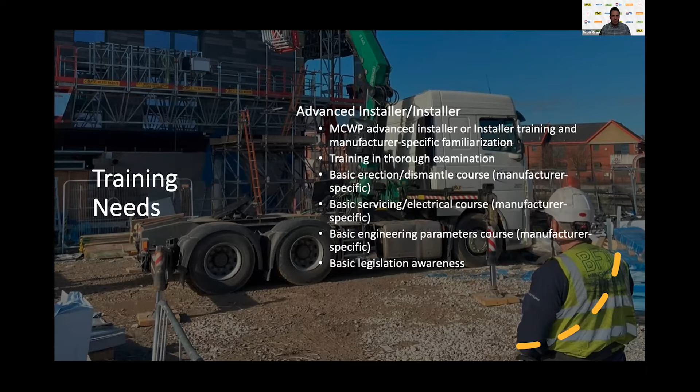Basic engineering parameters course, again, manufacturer specific, and basic legislation awareness. Whatever country they're in installing the equipment, they need to be aware of what the regulations and standards are in that country to ensure they're being compliant with the law. And this is all going to come as part of their installation training. And then a bit more for the installer. They've got a lot of responsibility, obviously.

They need their own health and safety awareness, again, for whatever industry it is they're in. Safe systems and emergency procedures, what to do in the event that something isn't going right or something's wrong with the equipment during the installation process, what's there, what's keeping them safe, and what the emergency procedure is, what to do to ensure we can get the machine recovered and back down to the ground.

Risk assessment guidance, again, installers need to have a good understanding of risk assessment themselves. They are the best placed people to understand the hazards involved when installing the equipment, and should be involved in that process of creating the risk assessments and method statements for their work on installation to ensure that all the hazards are being realised, and that we've got control measures in place to make sure the risks are kept to a minimum. And then slinging and signalling.

At some point, maybe when the machine's delivered, they may have to offload it. They may be using a site crane to do that. They may be using a vehicle mounted crane, a HIAB of some description, to unload the equipment. And then they may even use that then to begin the installation, to position the mast climber components, build the decks together, and maybe even put some mast up to the first tie position. So slinging and signalling training is going to be quite vital for them as well.

Then we get to our demonstrator. And as I said previously, our demonstrator's role is really important. They need to be able to give a demonstration of mast climbing work platform to others in a documented scheme, and have basic legislation awareness. Again, for whatever country it is that they're in the world, there will be some legislation in place, the regulations that say how they've got to go about their process.

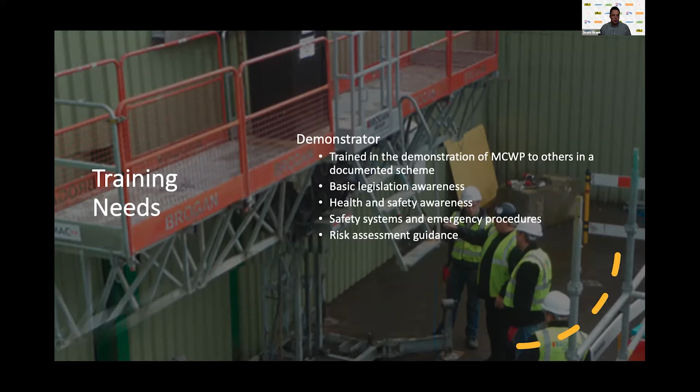And again, the risk assessment guidance, they're going to be more focused now on making sure the operator is familiar with the risk assessment for their specific task when working from the mast climbing work platform. So it's good to have that knowledge and guidance of risk assessment.

Then we get to our operator. We started looking straight away at our operator, but then realised we had all these other people to discuss first. We finally get to our operator now, who's going to need their basic operator training to know how to use a mast climbing work platform. Basic inspection and testing, an understanding of what's being looked at, what's being tested, so that they know what the parameters are, what the limits to the machine are, and that they can make sure the machine continues to work within those.

Again, the safe systems and emergency procedures. If something goes wrong on the machine, every other user on that platform is then going to be looking directly at the operator to know what to do and how to get that machine back down to the ground and everybody safely off of it.

And risk assessment guidance, again, not just for the use of the mast climber, but for whatever task it is they're performing from the mast climber. They need to have that understanding of the risk assessment, the method statement, what the hazards are, and how to eliminate or reduce them as much as possible. So they're all our training needs.

And this is where I now want to look a bit more closely at the role of the demonstrator in conjunction with our operator. So in 2016, IPAF launched the Mast Climbing Work Platform operator training course. And prior to that, all users of mast climbers were inducted or familiarized in the use of the equipment by our trained demonstrator. So this would usually be a very experienced person from the supplying company who, once the machine was handed over for use, would give that familiarization to the users in how to make the machine go up and down, what to do in the event of an emergency, how to emergency lower it, and various other aspects of machine use. It should be at least half an hour's worth of familiarization, but could be longer.

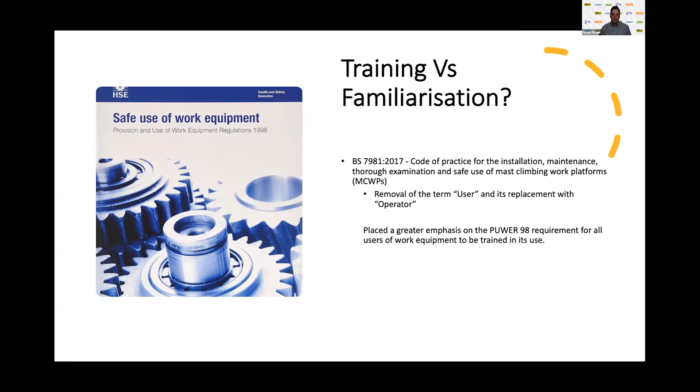And this placed a greater emphasis on the UK regulation, PUWER, which is the Provision and Use of Work Equipment Regulations, for all users of work equipment to be trained in its use. So again, we've got this operator training course, let's use it, let's make sure that our operators are properly trained to use the equipment, and let's get our demonstrators in there, familiarizing those people on different manufacturers or models of equipment. And this is going to bring about great benefits, certainly for the employer of the user.

Employers don't or shouldn't want to just merely tick a box and say, brilliant, someone's had a bit of familiarization training, now they can go ahead. They want to have some comfort in knowing that they've fulfilled their legal obligations, and that the equipment is now being used correctly and safely, and that the equipment is being kept in good order, so there's no unnecessary damage charges at the end of the project. Hopefully our operators are looking after the machines, using them correctly as they've been trained to do.

And our trained operator, who understands that they have a responsibility to themselves and others, is going to be a huge asset to the project. They know that the equipment is going to be used correctly and it's going to be better looked after. They're going to have confidence in their own abilities. They're going to have better knowledge of the equipment and what its limitations are. And they're going to be better equipped to spot any faults or potentially unsafe conditions.

So that concludes my presentation.

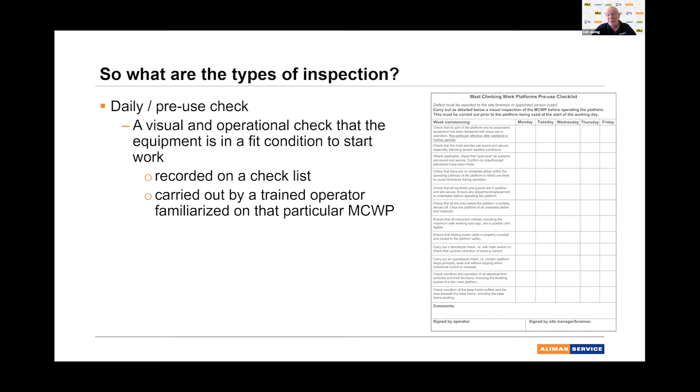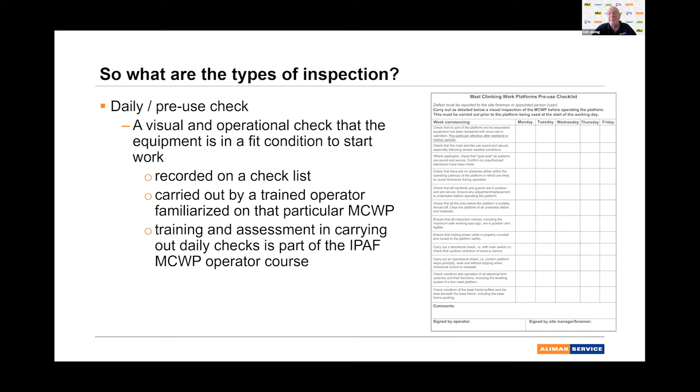It gives the user organization, the site, the benefits of being able to show that they have carried out pre-use checks. And it also gives the guys that are operating the platform the ability to be able to report defects in a way that is actually written. So they're done by the trained operator who has been familiarized on that particular mast climbing work platform. And the training and assessment in carrying out daily checks was part of the IPAF Mast Climber Operator course, probably a key part of it.

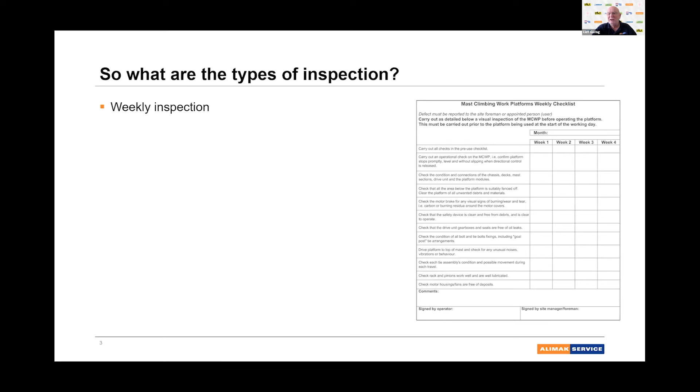Beyond the daily checks, there are weekly inspections. So they're very slightly different in so much as the inspection is a check to make sure that the machine is still safe to operate. Yeah, it's looking at damage, wear, and that the safety functions work correctly. Again, there's a checklist provided, which is normally machine specific. The one on the right is a generic one from the British Standard again, and that's BS 7981.

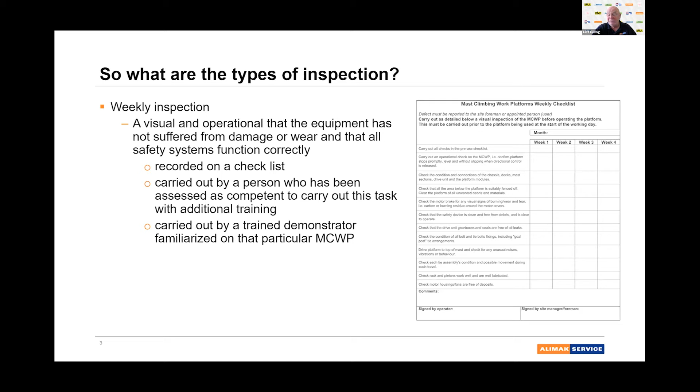It consists of all of the daily checks, plus additional items where you're actually looking at things in a bit more detail. So a person who carries this out has been assessed as competent to do it, and they require additional training to achieve that. This is one of the differences between the operator and the demonstrator courses. Demonstrators are trained and assessed in weekly inspections. The joy of it, being the demonstrator rather than the operator, is you've now got a different person doing the checks. So you're effectively auditing the daily checks, which increases safety.

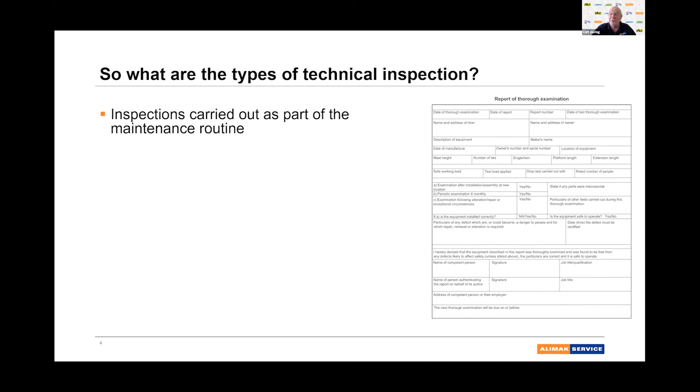Then we've got some more technical inspections. So these inspections are carried out as part of the maintenance routine. The inspections that are done here are typically done by a service engineer. So this is a guy with mechanical and electrical skills who will be looking in much more detail at the machine. And typically a supplying company would provide the person that does this, and they may be done six weekly, may be done monthly. It depends on the site conditions and what the machine is being used for, how often these services take place. And those inspections are based on what the manufacturer's literature suggests. So all the manufacturers for all the products have a target list of maintenance items that should be carried out. Some of it includes inspection, some of it includes actually adjusting things. So all done by a service technician.

The next type of technical inspection is a bit more in depth. And depending on what country you're in, there may be a legal driver for this. Certainly within the UK, we have the Lifting Operations and Lifting Equipment Regulations, which stipulate exactly what needs to be looked at and the format of the report and how long those reports are kept for and where copies of them go. So this is a statutory examination that is carried out by somebody identified as a competent person. So beyond what a service technician would normally do. It's a complete check of the equipment for continued safe use and also whether or not the piece of equipment has been installed correctly, if it's the first thorough examination.

The thorough examination itself can include testing, which is in the remit of the competent person to decide what type of testing may be carried out. So it may include load testing, could be tests of safety gear, could be tests of electrical systems, the inclination system on the machine. There are numerous extra pieces depending on what product it is. Could include dismantling components, though typically the machines aren't dismantled while they're in use. So normally the dismantling inspection of component parts is done as a function of a thorough examination that's carried out at the hire company. So things like the internals of a gearbox, wear on gearboxes would be typically done in the service centre of the hire company rather than on site. But it's down to the competent person to decide whether or not they want to go into more depth during the thorough examination. And again, it depends on site conditions and how the machine is being used.

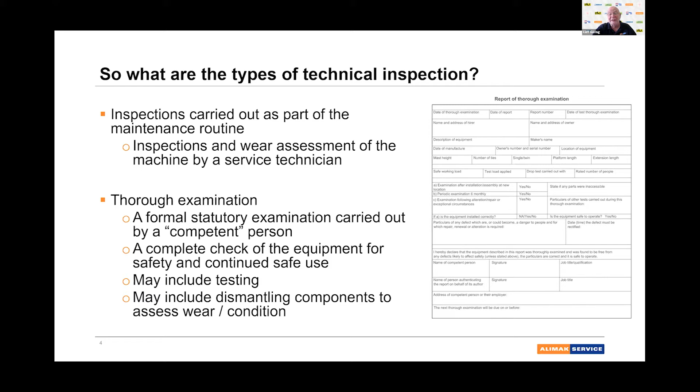Competence for doing the technical inspections is a little different from the competence for doing the basic checks. So advanced installers, when they do their advanced installer course, are actually trained during the course, and then they carry out an assessment with an IPAF instructor in carrying out a thorough examination on the installed mast climbing work platform. So they're given the general skills that would enable that level of competence to be demonstrated. Obviously, that would then need to be backed up and reinforced by manufacturers' training and experience of actually carrying out thorough examinations in the field.

IPAF have just introduced the CAP scheme, Competence Assessed Person scheme, to mast climbing work platforms. There's a difference here in that a CAP qualified service engineer or installer has quite a precise recruitment requirement: a demonstration of technical expertise, a demonstration of training from manufacturers, and also demonstration of experience in installing. So these guys are highly qualified industry people rather than being from a third party.

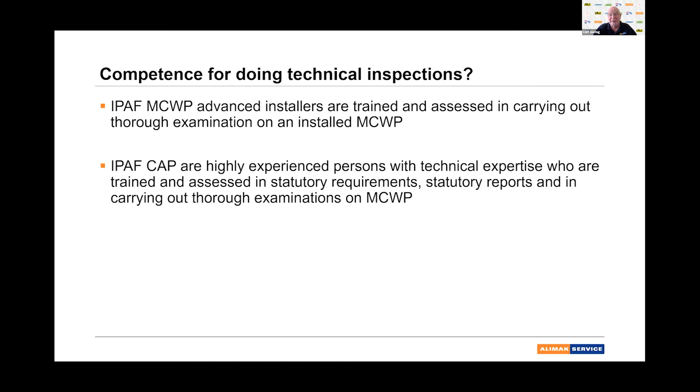The CAP course reinforces what the statutory requirements are for whichever country the course is being run in, and the production of those statutory reports. So the guys are assessed on actually carrying out a thorough examination on an installed piece of equipment, and also assessed on their production of reports, the way they approach the thorough examination, and the way that they look at defects.

The third sort of parties that are involved in this are where the site decide they would like somebody that is completely independent of the hire company that they've hired the equipment from. Sometimes it's because there are insurance requirements. So those are typically done by an engineer surveyor from an engineering background. So these guys are very highly experienced persons and have gone through a fairly rigorous training routine, probably across multiple disciplines. They may do pressure vessels, vehicles, and mast climbing work platforms.

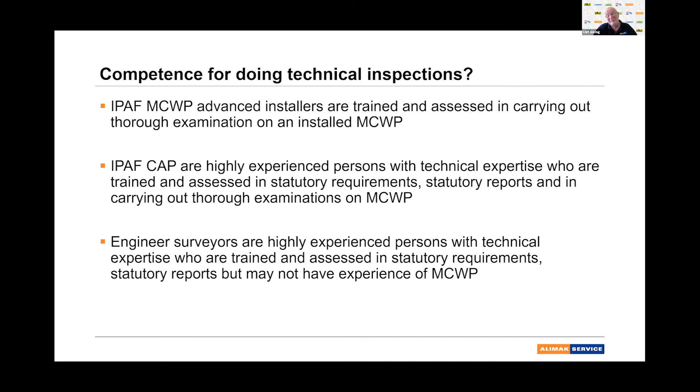The problem with the engineer surveyors is they might not necessarily have the level of experience as a CAP assessed person or even as an advanced installer of a mast climbing work platform. So there are pluses and minuses to using an engineer surveyor.

The LOLER ACOP for lifting equipment identifies a definition of a competent person, which is particularly good. So this is from UK legislation, but it can be taken as good practice. So how LOLER describes a competent person is quite specific. So the person carrying out a thorough examination has got to have appropriate practical and theoretical knowledge of the equipment that he's examining that would allow him to detect defects, detect weaknesses, and then assess the importance of those defects and weaknesses against the continued safe use of the equipment.

So the guy that does this examination has to be able to certify in his report that, in his opinion, the piece of equipment will remain safe for the length that the report covers. And typically, where people are involved, that would be 6 monthly, though that is UK specific.

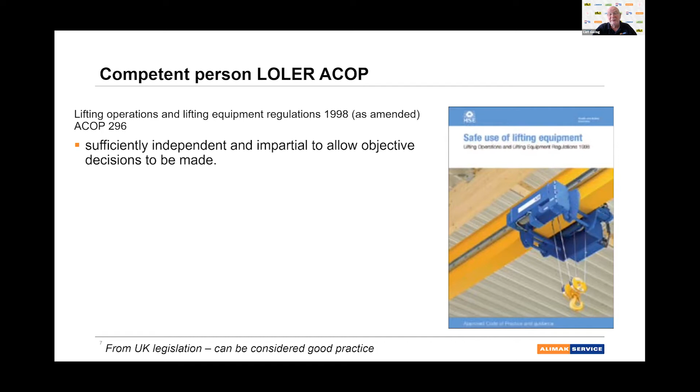There's further information expanding on that definition, which is where LOLER suggests that the person doing a thorough examination needs to be sufficiently independent and impartial to allow them to make objective decisions. They've got to have the genuine authority and independence that they can do the examinations properly, and that the recommendations they make in their report can be made without fear or favour. And that's one of the reasons why you would typically not end up with a person that installed the machine or maintaining the machine carrying out the thorough examination.

There's a separation there. Even on a basic level, if the guy that installed the machine examines it, if he doesn't know he's doing something wrong, it will be right in his report. So having it done by somebody different gets over that, though it doesn't say in our legislation in the UK it can't be the same person. It just suggests it shouldn't normally be.

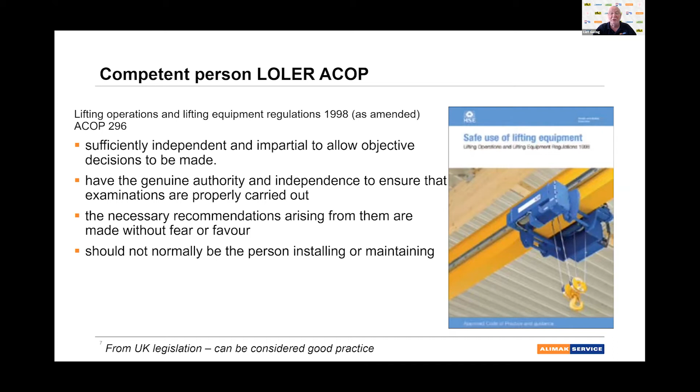The goals of the thorough examination are quite precise. So the first one is it determines that the mast climbing work platform has been installed correctly and is safe to operate. So this is normally done at the end of the installation prior to the machine being handed over to the users. If it's a periodic thorough examination, the goal is to detect any defects or weaknesses and assess the continued safe use of the mast climber.

Secondary functions are it determines that any alterations, repairs or additions have been carried out correctly and the mast climber is safe to use. Production of a report that states that the machine is safe to operate, and that is the responsibility of the person doing the thorough examination to do that.

If it's a first thorough examination after installation, there is also a requirement for a statement to say whether the machine is installed correctly or not. So the knowledge requirement is quite high for the person doing this.

Identification of any defects that may become a hazard, details of what the repairs might be to repair that hazard, and details of anything that might require action in the future. So things like an assessment of wear. It may be that the assessment of wear says that this particular roller will last another 6 weeks, and that would be one of the things that would be written in the report.

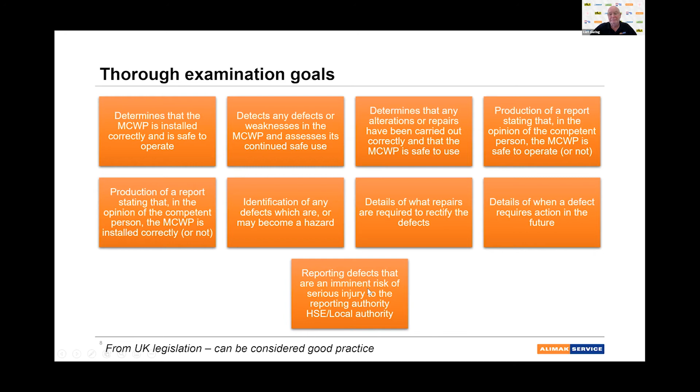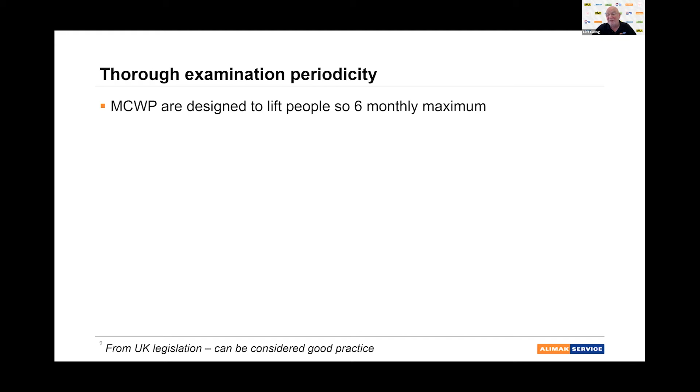There we go. So periodicities of thorough examinations: under UK legislation, because the machine lifts people, they are done at a 6-monthly maximum interval. Some other countries in the world are 12 months. There's the odd 13-month one, but 6 months has been considered, certainly bringing knowledge from working at sea, as the normal examination period you would do on pieces of equipment where there's a risk. So all of these are risk-based. So they're done after installation, before handover for use.

Changes of configuration. So quite often when a mast climber is installed, it may be one length for the first 3 or 4 ties, and then because the building design dictates it, it might need to be made longer, might need to be made shorter. It may need some rollout deck extensions or something along those lines. So those are changes in configuration. Could even be that somebody wants to have a payload change because of a change in tasking, typically things like glass loading robots and that sort of stuff. So the machine would require to be thoroughly examined in that new configuration.

Exceptional circumstances are not identified in LOLER, but they are in the Provision and Use of Work Equipment Regulations. And exceptional circumstances are things like the site customer decides they would like the thorough examinations done more regularly because they feel that would be safer. That would be an exceptional circumstance. Weather outside of the standard tie loadings, accidents, near misses, accidents or near misses on a similar product, even if it's on a different site or perhaps even in a different country.

So these are all safety checks that are done at the minute level by somebody with a very high competence level. Yeah, and it's the duty holder's responsibility, i.e. the person that runs the site, to ensure that these periodic thorough examinations are done.

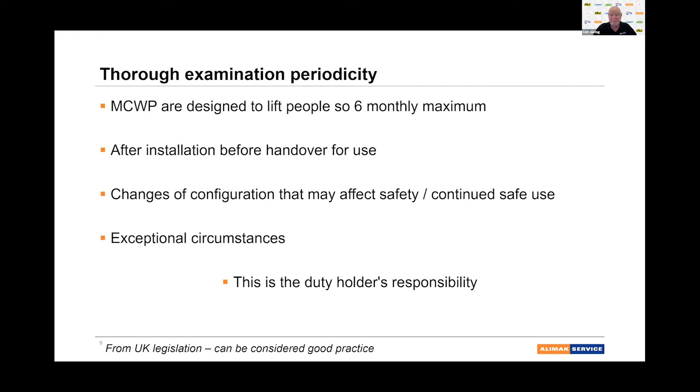One of the things that LOLER highlights is that there are specific items that need to be in the report of thorough examination. And this particular one, again, is from British Standard 7981 for mast climbing work platforms. It's an example of a report form for thorough examination that complies with Schedule 1 of LOLER. Effectively, you have to have certain pieces of information that are identified to make the report correct. So the boxes on there have been selected so that you can cover the items that Schedule 1 suggests.

So things like the safe working load, height of the mast, number of ties to the structure, the length of the platform, length of any extensions, as a way of identifying the configuration. Name and address of the owner, where the site is, any defects, how to repair those defects and any timescales. And then finally, the signature of the competent person that's carried out that report. May be authenticated by a second person. And that is the legal document that would stay on site throughout the installation. Copies of it would be held back in the supplier's paperwork as well.

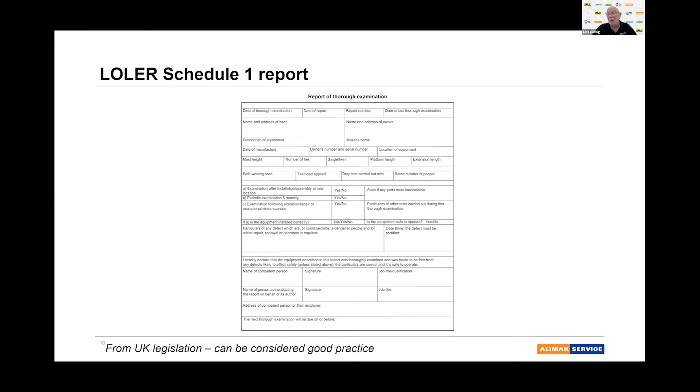So what was achieved by carrying out these inspections then? It fulfills the employer's moral and legal duty of care towards people that are employed by them on that task, people that are employed by them that happen to be bystanders to that task, and members of the public. So a moral and legal duty. Having the inspections done where you have written records of them as well means that those records can be produced in case anything does go wrong, to demonstrate that you've made an attempt, a very good attempt, to cover your legal duties.

It also allows the timely discovery of defects, because of course, if there is an incident, typically there are fairly large financial and reputational damages that result out of that incident, and carrying out the inspections can avoid that. A relatively small outlay over a period of time can prevent costly repairs. So I'm looking at things there where wear of an item can cause wear on another part that ends up very expensive, when you could have replaced the part or adjusted the machine to avoid that extra wear. So it is a way of saving money over the lifetime of the machine.

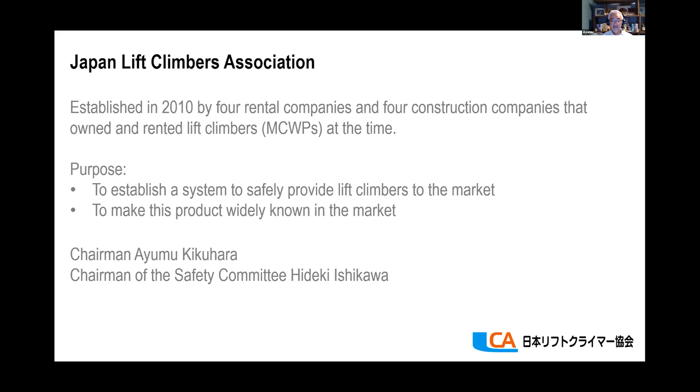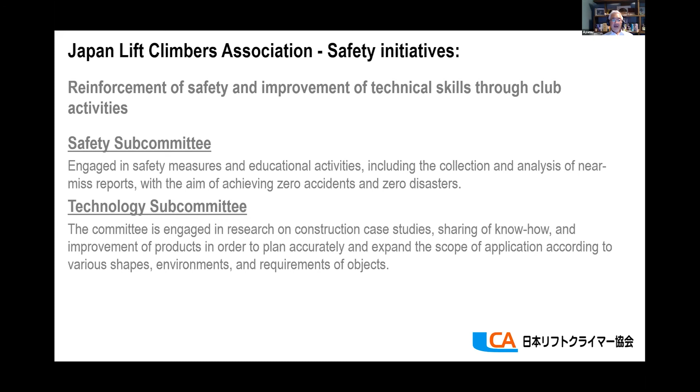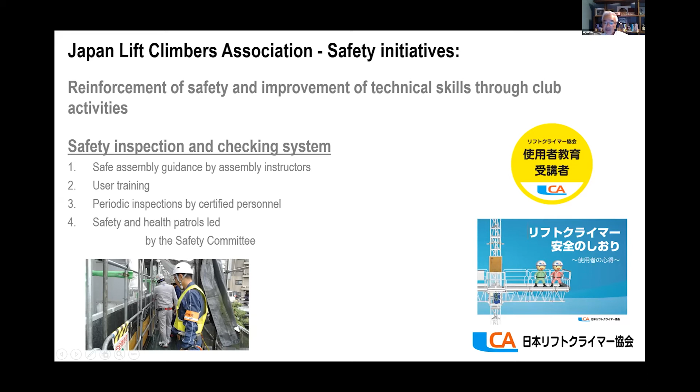And we are basically working our committee with 2 different divisions. One is safety, one is technology. And very important are the 4 checking systems in the association: one for user trainings, one for assembly guidance for all the instructors, one for the periodic inspection by certified personnel, and one is a safety and health patrol by the safety committees. And to the right, you can see the little sticker that goes on the hard hat. Whoever has been trained will receive that. And also we provide all the leaflets.

And we give the qualification to 4 different parts. One is the installation planners, which are the engineers that do the drawings for the job site, how to set up the machines. Number 2 is assembly instructors. We will send to each job site an assembly instructor who is qualified in our association. And number 3 is the safety inspector.

Every month, we will send the safety inspector to each job site, and they will inspect that the job site is all controlled, and that they have done a daily check and so on. And number 4 is maintenance technicians for all the rental companies and all the constructors who own the work platforms.

And for those qualifications, you have to study about 120 pages of the textbook that explains what a mast climber is. And for each division, you have another 50 to 150 pages of text that you must study. And you also have to come and meet, and we provide a test. After you pass the test, you will receive the qualification and we will sign. And all those qualifications last for 4 years, and you have to renew every 4 years.

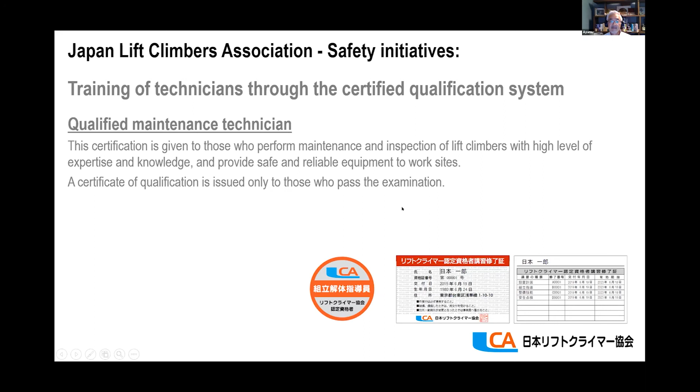For example, as a qualified maintenance technician, after you pass the examination, you will have the mast climber maintenance technician license, and you will also receive a sticker for the hat showing you are a qualified maintenance technician. Maintenance technicians meet once a year in June, and we sit in a class and also on the job site or the warehouse. We learn and share how we are improving the maintenance of the different types of machines and things like that.

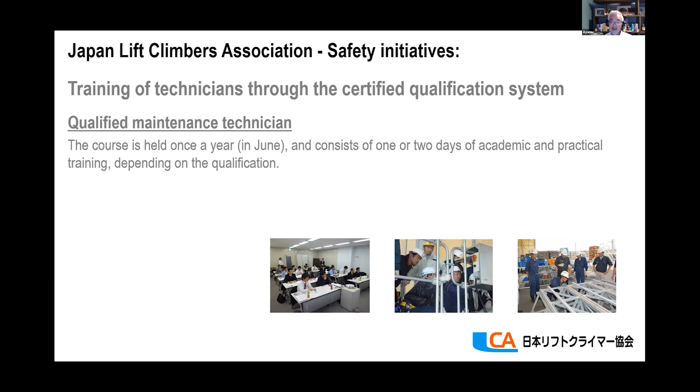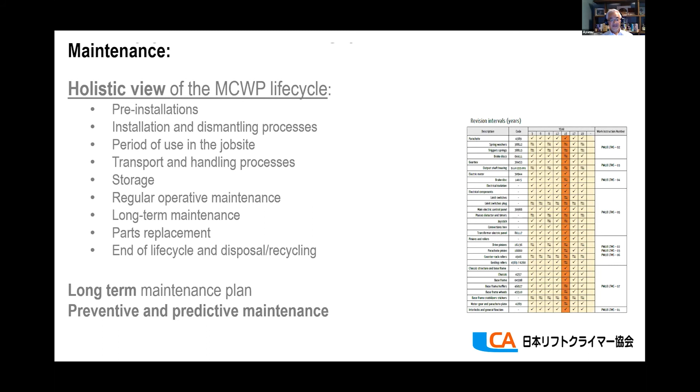What we are focusing on is that on a job site or when training people, you never know what kind of people will come. So we are trying to visualize the maintenance flow as much as possible, so you can see what part or where you need to focus maintenance and why it's important.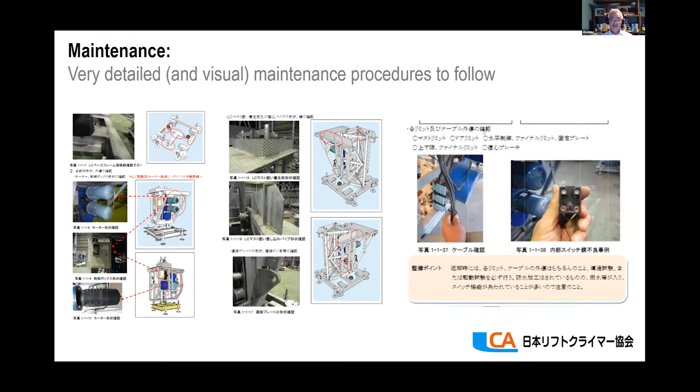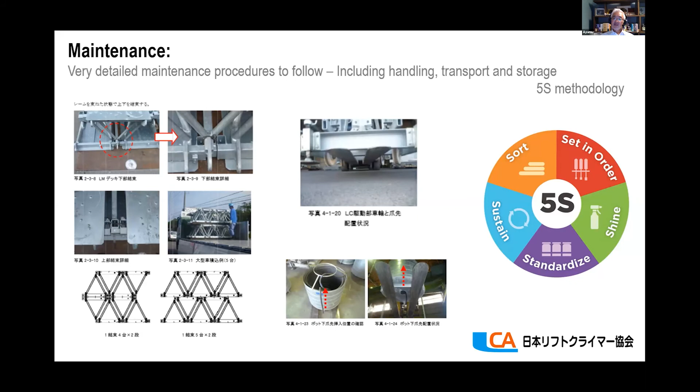And we try to be as detailed as possible about what kind of parts need to be checked, what kind of transportation needs to be done, and how to store in the yard. For example, with the trucks, this is how we recommend, or actually all the rental companies have to follow the rules on how to use the trucks, or how to tie the mast sections or floors, and so on.

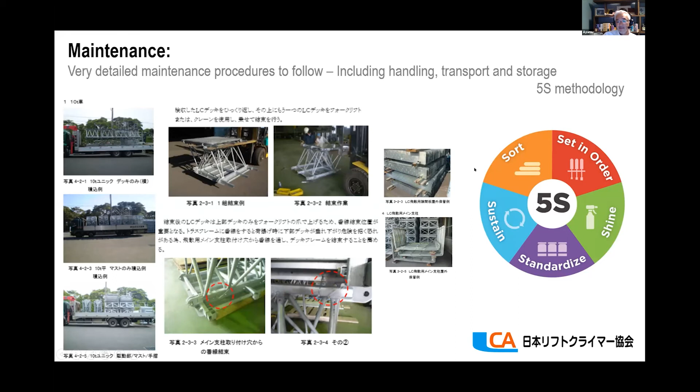And this is also the very detailed maintenance procedure: how to take the parts, where it needs to be checked, and how often it needs to be checked. We set certain rules, that every motor brake needs to be checked every 6 months, and the second type of brakes, for example the parachute, needs to be checked after 300 hours of use or 1 year, whichever comes first.

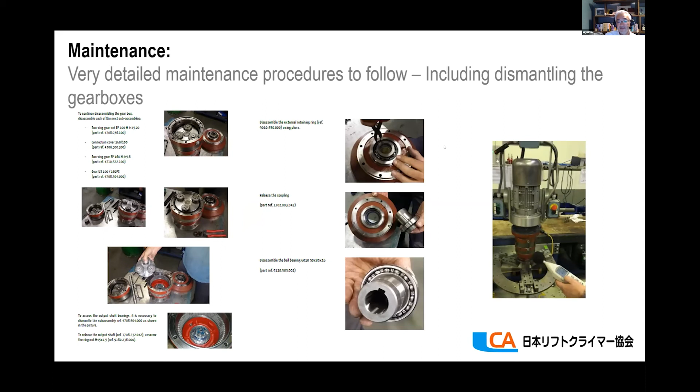And we also do overspeed and overweight testing in the yard. We don't do it on all of them; we choose randomly and check in on that brake test.

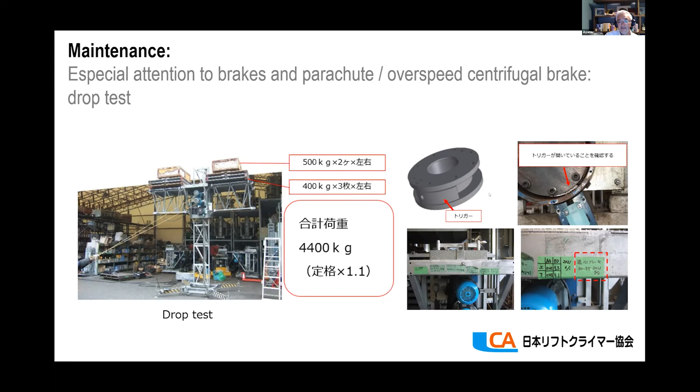As I explained, we need to do brake calibration constantly, because under Japanese regulation we must have a second brake system other than the motor brakes. And this is the last line to avoid serious accidents. So we take very good care of these kinds of tests, and the member partners have to follow these rules.

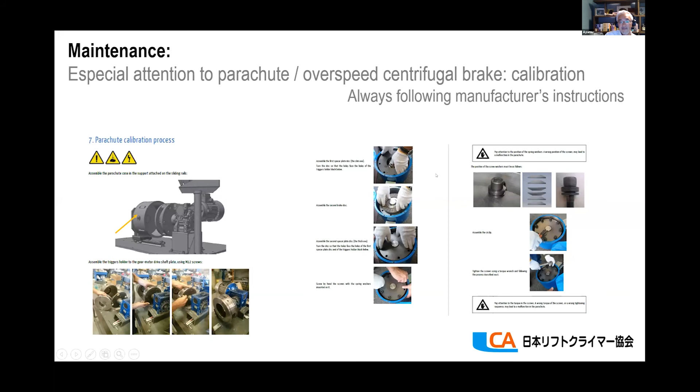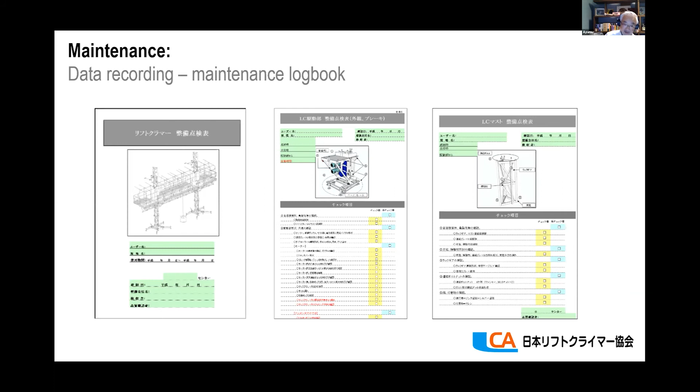For instance, if there is any motor brake breakdown or something happens, we go to the serial numbers of each machine, and we will know what kind of manufacturer or who made it and what year, and we can track it. So we will check all the units, all the machines that are manufactured by that manufacturer. And it's a maintenance logbook also.

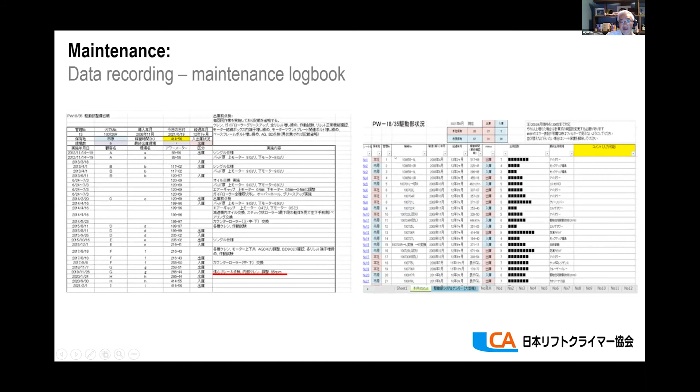Sorry, but it's all in Japanese, and this is what we are doing in Japan. But the most important thing that I experienced is you have to do what you should do, and not do what you should not do. And that's the most difficult part.

So no matter how many rules you make, all the planners, all the inspectors, all the installers, or all the maintenance people, you have to do what you should do. And that's the most important thing, and that's the key to it, I believe.